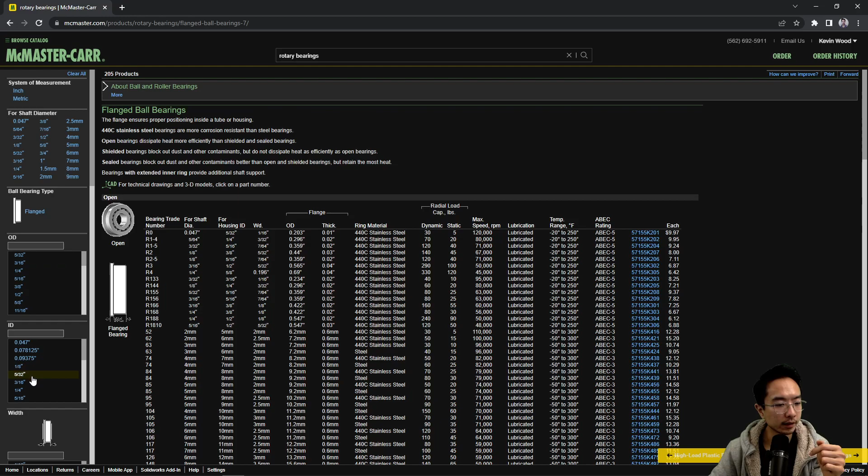Okay, so let's take a look at a classic, maybe a classic flange one. So let's see, ID of, could do a 1/4 inch one. So for a shaft of 1/4 inch, see a product detail. So you can see that the outer diameter here, this is typically undersized. And then you can also see the shaft hole in here is also undersized.

Okay, so a lot of times to have very good contact, there's certain rules you may need to follow in terms of how to press in the shafts and the tolerance of the shafts to have a good fitting. So I won't go into too much detail on that in this video, but you could look up some of the specifications in terms of how to press it in or what tolerance to have to achieve the best fitting. But for a lot of prototypes that you make just for something quick and dirty, you typically want something that's easy to assemble, so you may deal with tolerances that are a little bit more forgiving.

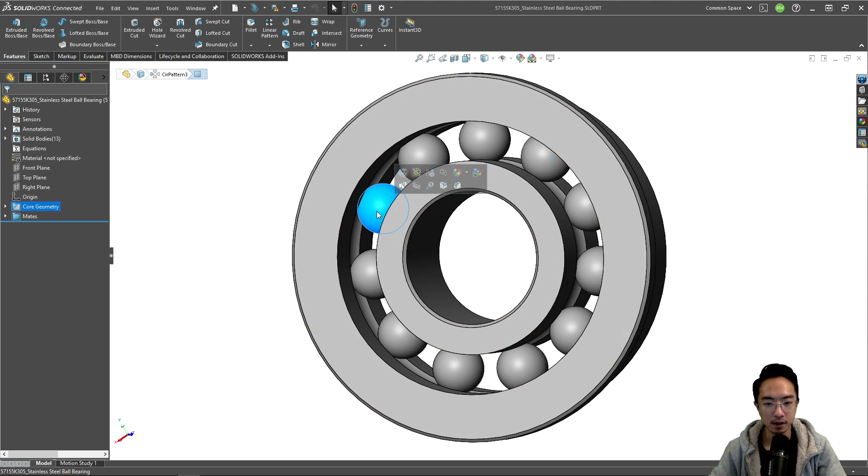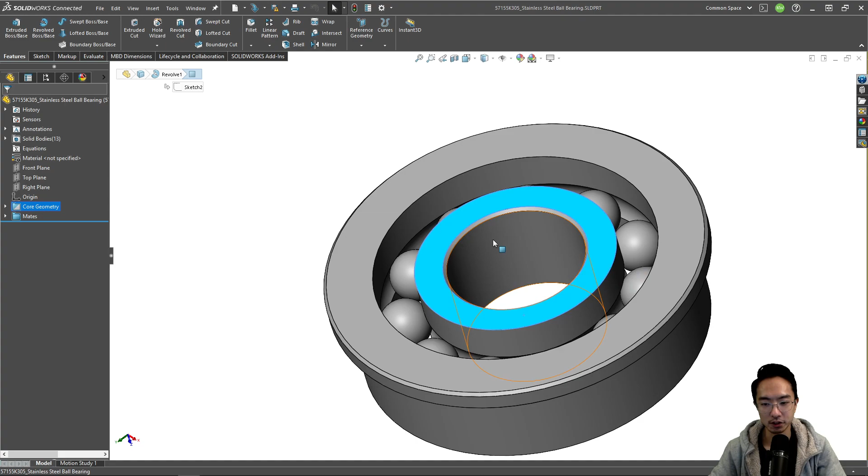Okay, so I'm going to download this ball bearing in our rotary bearings folder. So if we download this, you could take a look. You could see the tiny balls inside and the track. So if I do a section view, you could probably see a little bit better. Yeah, so you can see the track in here is what allows the balls to stay in place and rotate. So usually this will be pressed into something, and then the shaft will be in contact with this surface, and then the circle will be rotating back and forth.

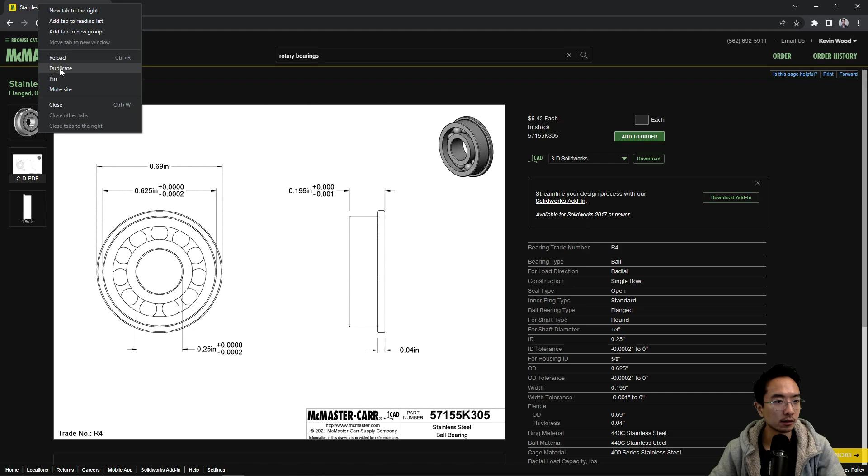Okay, so let's go ahead and make a plate. And there's one more thing I didn't touch on quite yet. So let me duplicate this tab. Sometimes you also see double row ones. Let's see if we can find it. Sometimes you'll see it in these main assemblies. Let's search the bearings again. Let's look up double bearings.

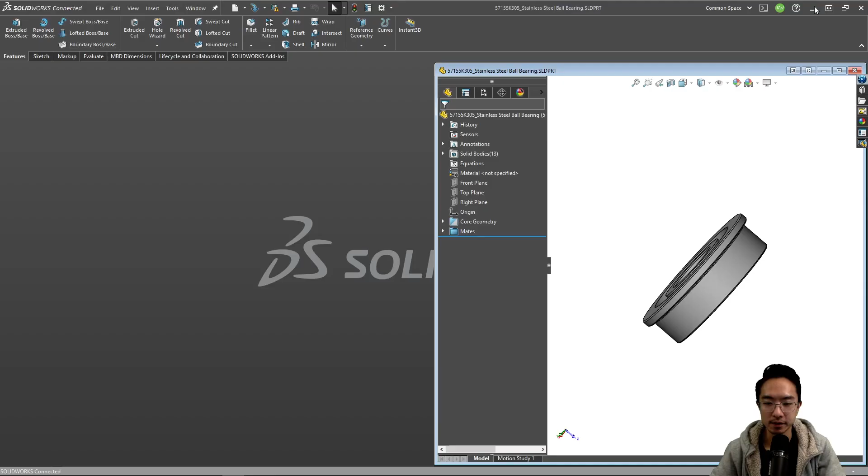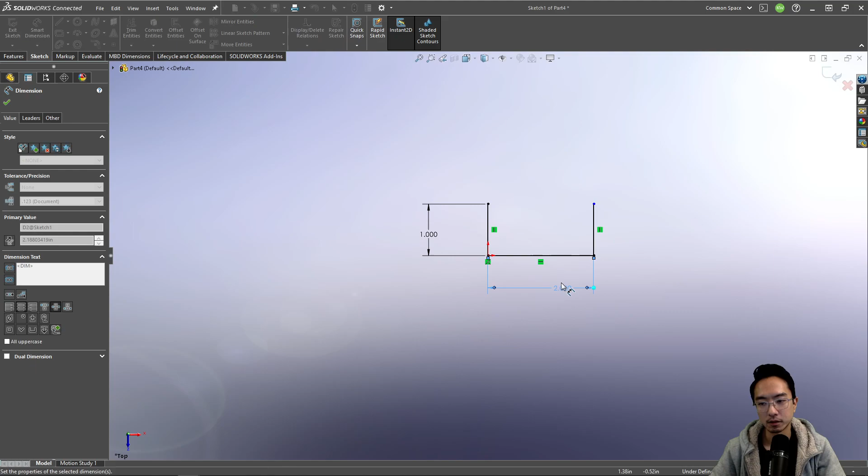Let's make this 1 inch, make this 2 inches, extrude boss this to be, just make it 0.9. Let's go back to our rotary bearings. Just call this U channel.

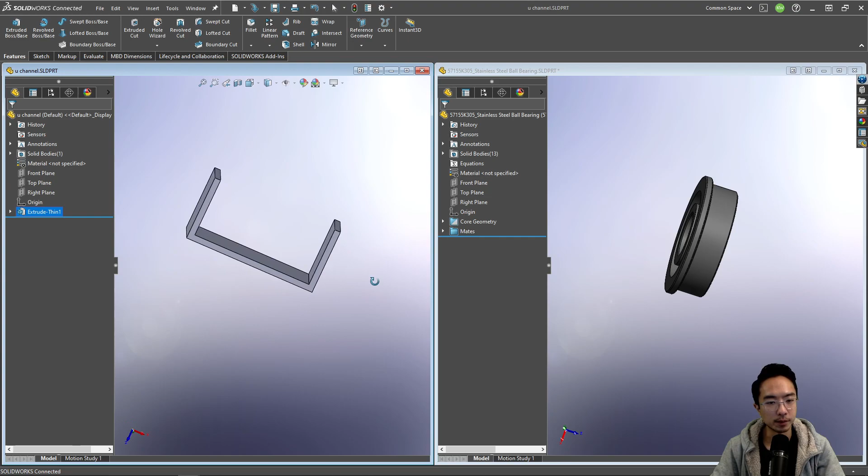So we may want this a little bit thicker because if we look at this, the minimum distance that this is going to be 0.15. So we could go ahead and make this a little bit thicker. Let's call this 0.2 instead.

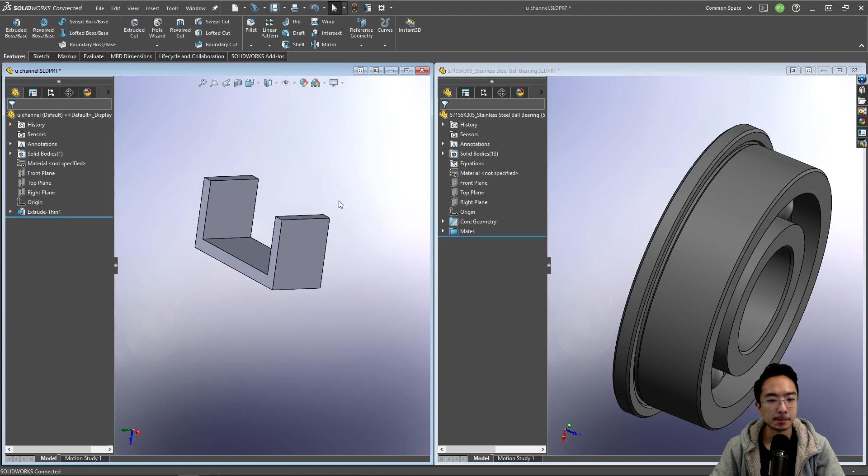Okay, so to have this fit properly, we know that this is a 0.625 hole. And in the hole wizard, we could actually account for this. So if we look back in our drawing here, this is 0.625 and then 0.69. And the depth is 0.04. Okay.

So we can make a counterbore hole. Counterbore, where is it? Hole here, and then you could choose. I think it was this one. You can make a custom one, or you can also do like a socket. I forgot which one it was. This one.

Yeah, this one was a counterbore, and then sometimes you could just choose a screw, and then you could do a custom sizing. That's another way of doing it. So that might be easier, but you could see here that's the main hole here. You could see that this one that we wanted was 0.69. So we'll input that.

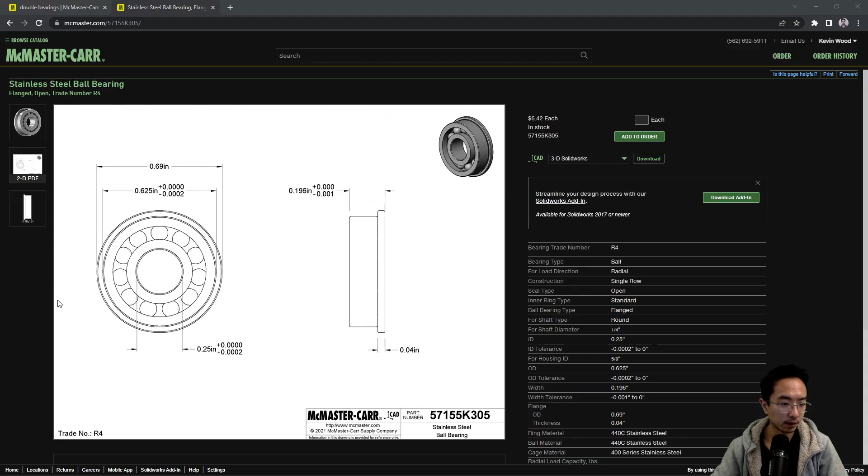And then the inner hole is gonna be the 0.625, right? And then the depth of the top part, I think it was 0.04. Yeah. So this here will give us our bearing hole. And if I save this,

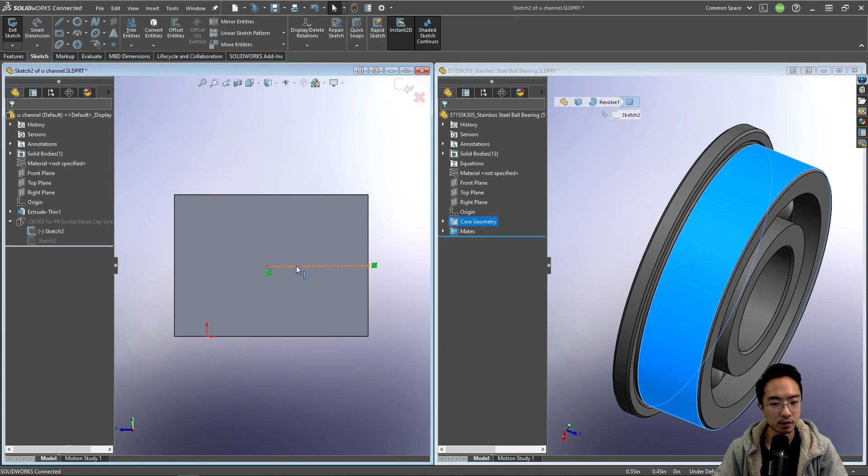So this is a very weird location. I'm just gonna go normal to it and let's just place it at a little bit better position. And let's call this 0.5. Okay, so if I put it in my assembly, put my U channel, and then this bearing here.

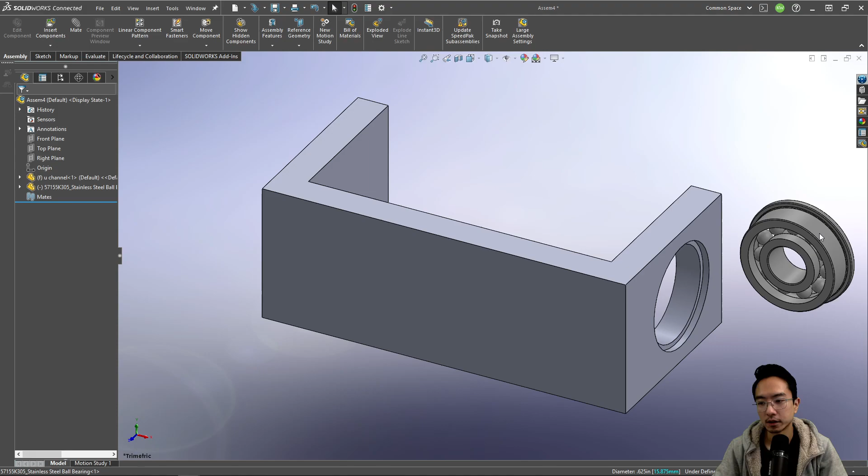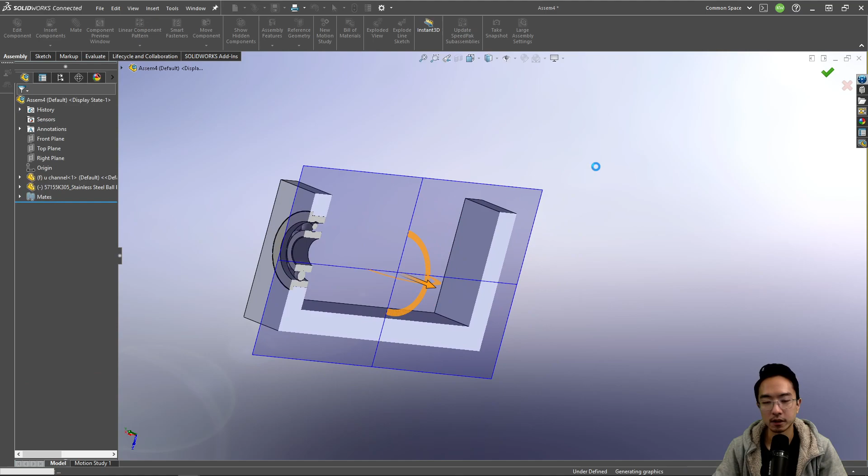Okay, so if I mate this to this hole, it should look like this. And then if I mate this to that surface, you can see that this bearing should be assembled. Okay, so if I do a section view, we could take a look at how that looks like. You can see the bearing lip will rest right in this pocket.

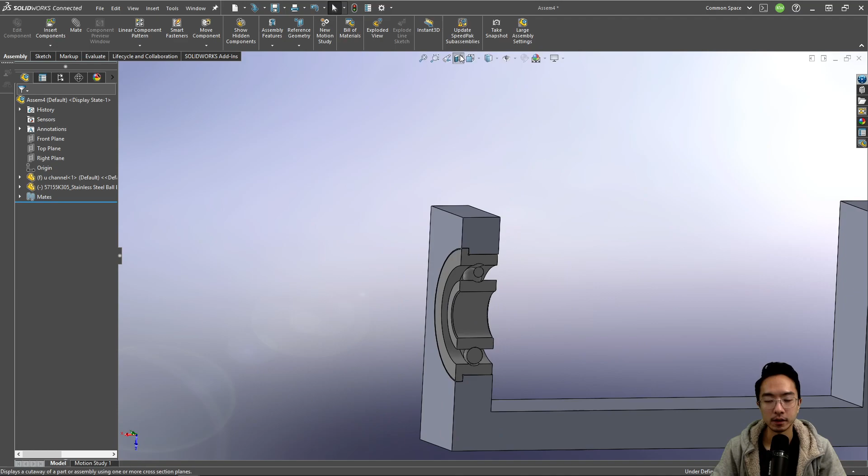And then you can see the bearing has this little cutout here to allow you to have a corner to fit inside. And then the rest of the bearing will just sit inside this counterbore hole. Okay, so we could repeat this process for the other part. So if I look here, I could add a second one.

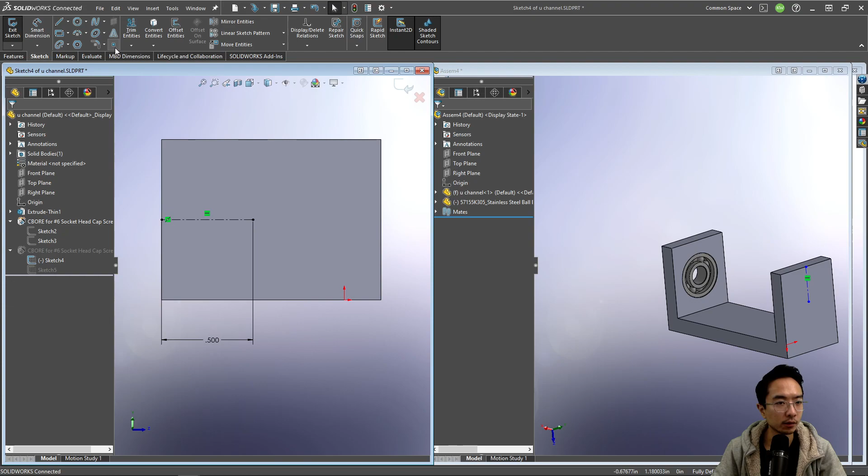And then just gonna delete. If I edit it, normal to, and then let's put it in the same location. It did not like that. Let's delete that point there. Okay, and then we'll draw our point here. Okay, so we have 2 now.

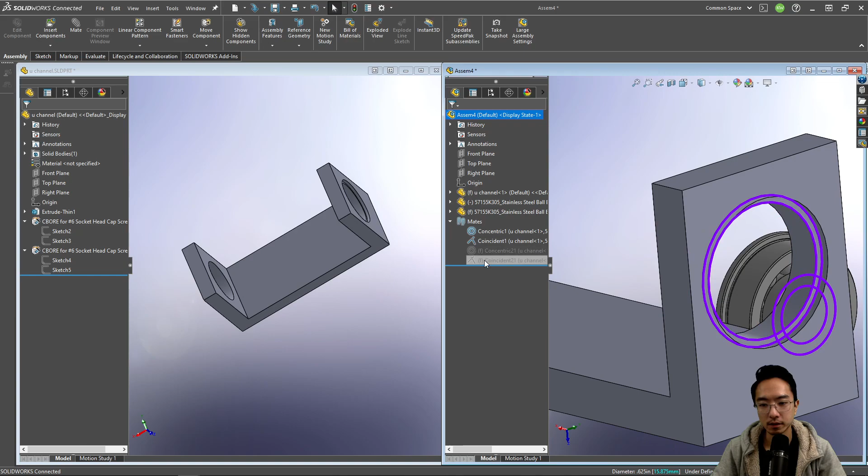We could have also mirrored entities if we'd like, but go ahead and do it this way. I think the mates misbehaved. Okay, let's try this again.

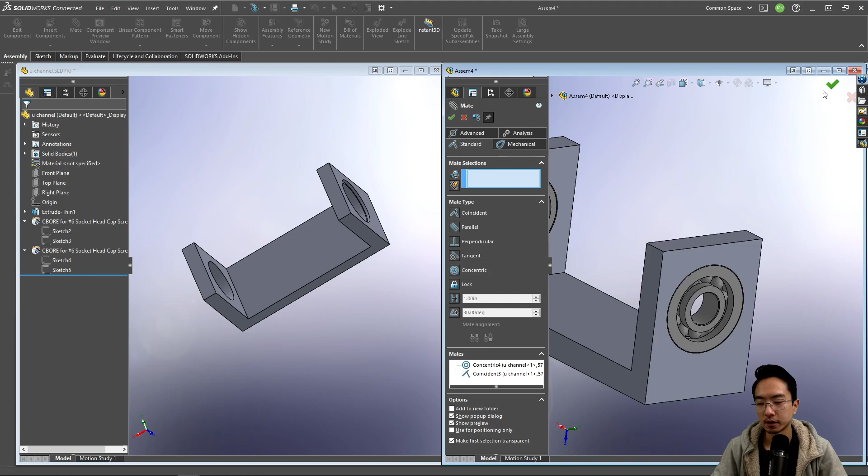Okay, we're gonna mate this, and then we'll flip it. And then we'll choose this surface to mate with that surface. Okay, so now we have a structure here with 2 bearings. And if we had a shaft that went in between, we could go ahead and do that.

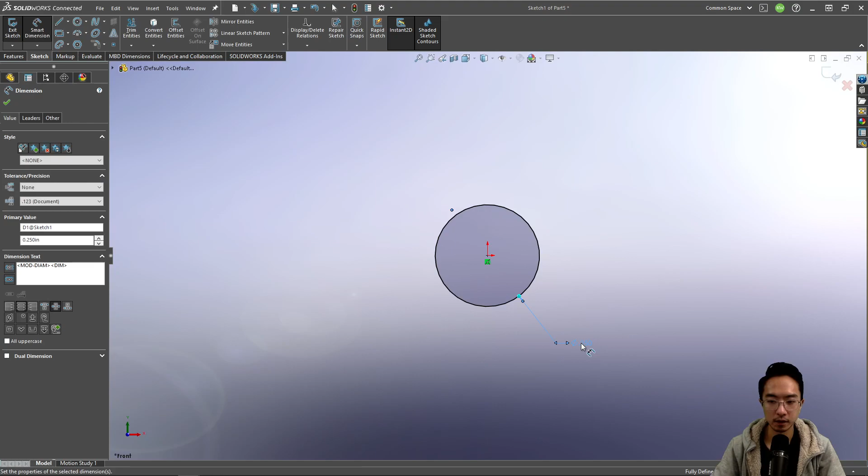So just quickly make a 1/4 inch shaft here. Make a sketch in our front plane. Let's make this 3. Okay, I'm gonna drag and drop this in here, and then gonna mate it to. Let's try this again. Didn't like that. Let's make this floating.

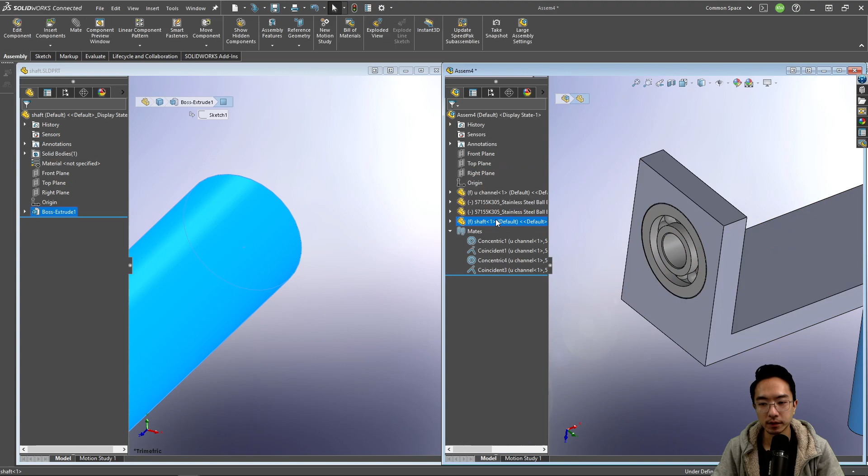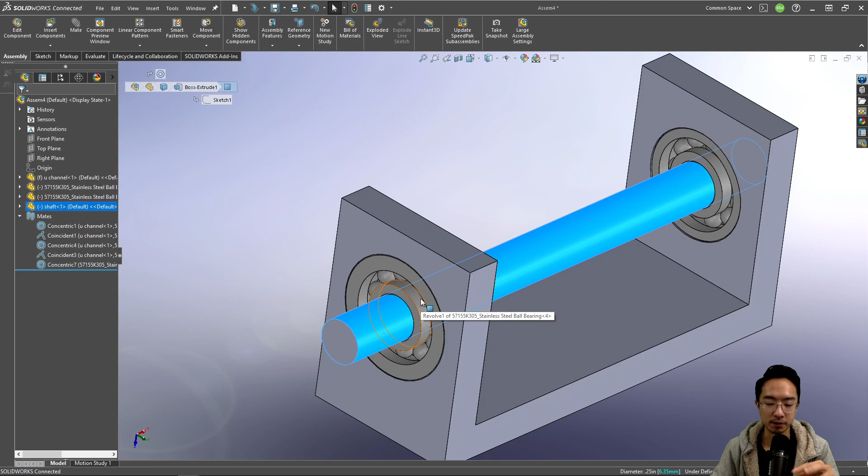Okay, so now we have a shaft that is connected to the body. So we can apply our shaft collar and retaining ring concepts here, but now what we gain is if the shaft were to rotate around the structure, then because of the bearing, it will have very low friction. So that would be the advantage of the bearing.

So if I do a section view, we could see what's happening here. You can see we have a shaft that's going between 2 bearing sets. And the reason why you may not just want one bearing on one side is because if you have something long, there's a moment arm, so it's going to create a lot of torque on one side. So usually, anytime you have something long, you want to have it supported on both ends.

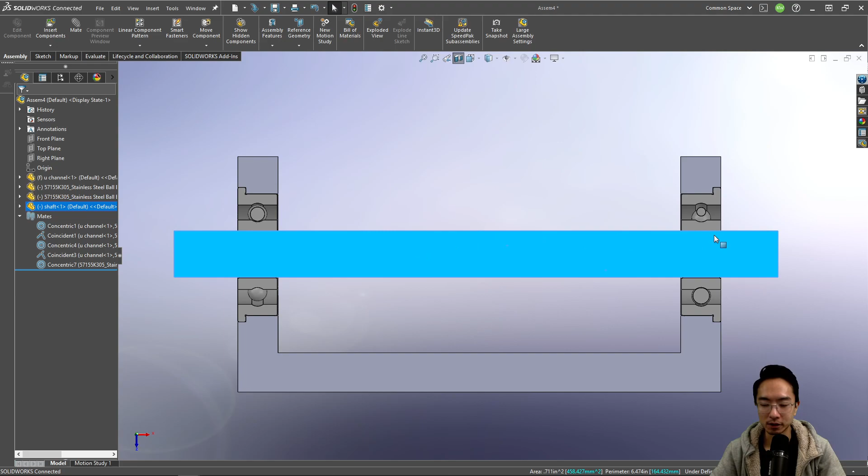And you could do moment calculations and all that good stuff to see where you need to place it exactly, but sometimes intuition is good enough to let you have good judgment to figure out where to place it. So this will do for bearings, and hopefully this will give you a good idea of how to take one and put it in your assembly, and just general tips on why you need it.